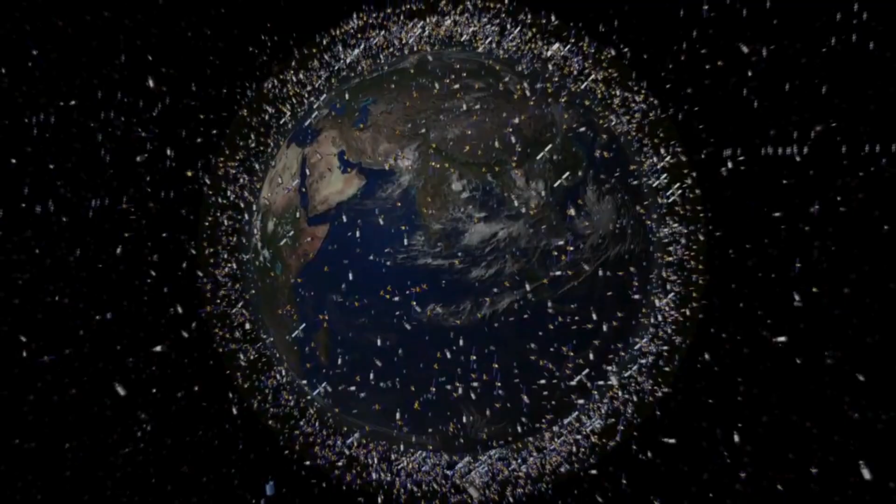The population growth, rapid urbanization, and the changes in the city of Hyderabad has seen the coming of the Greater Hyderabad Municipal Corporation. The Greater Hyderabad Municipal Corporation, or GHMC, is the local government for the cities of Hyderabad and Secunderabad.

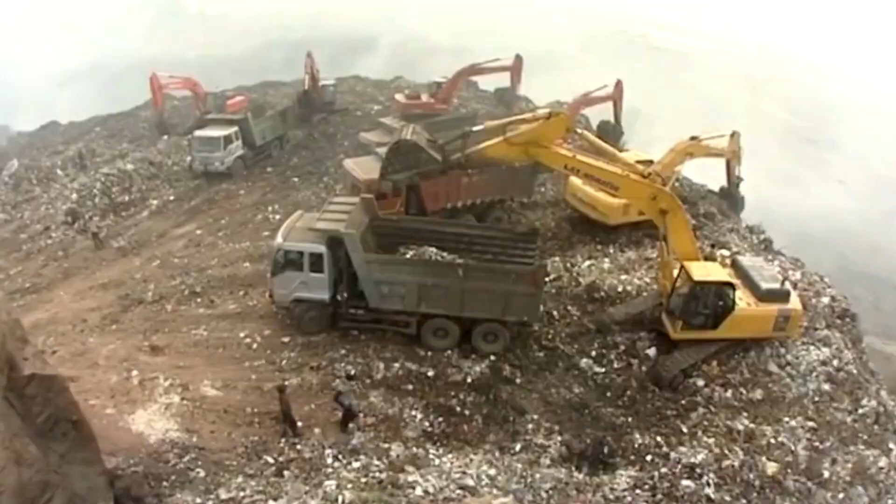Improper management of municipal waste by disposing it unscientifically into open dumps and landfills is creating huge problems to public health and environment. With a commitment to better the environment and to provide the best sanitation services to the citizens of Hyderabad, Ramki Enviro Engineers, a pioneer in waste management, has established a quality delivery system, the Integrated Municipal Solid Waste Management Project. The HIMSW project uses the most environmentally sound strategies for municipal solid waste.

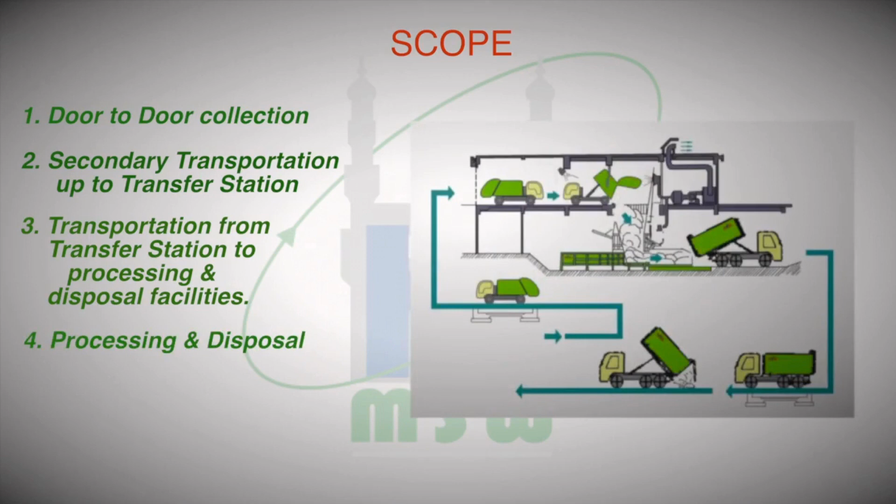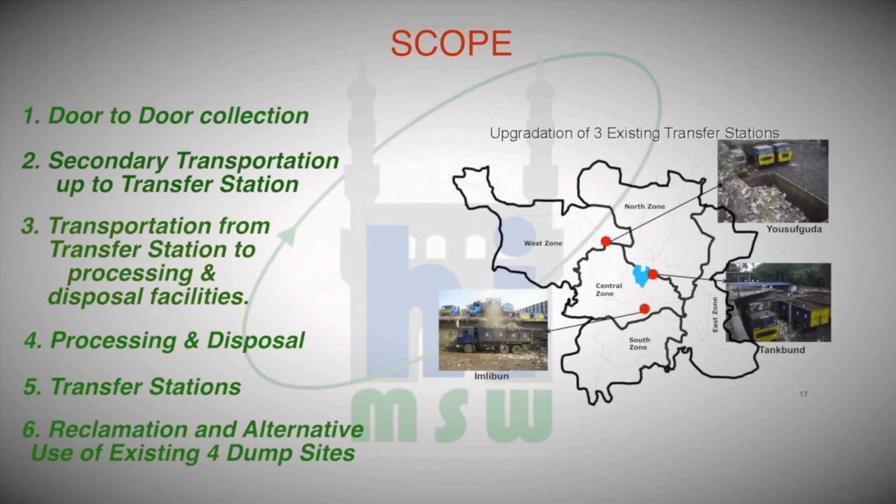Scope: door-to-door collection, secondary transportation up to transfer station, transportation from transfer station to processing and disposal facilities, processing and disposal, transfer stations, reclamation and alternative use of existing 4 dump sites.

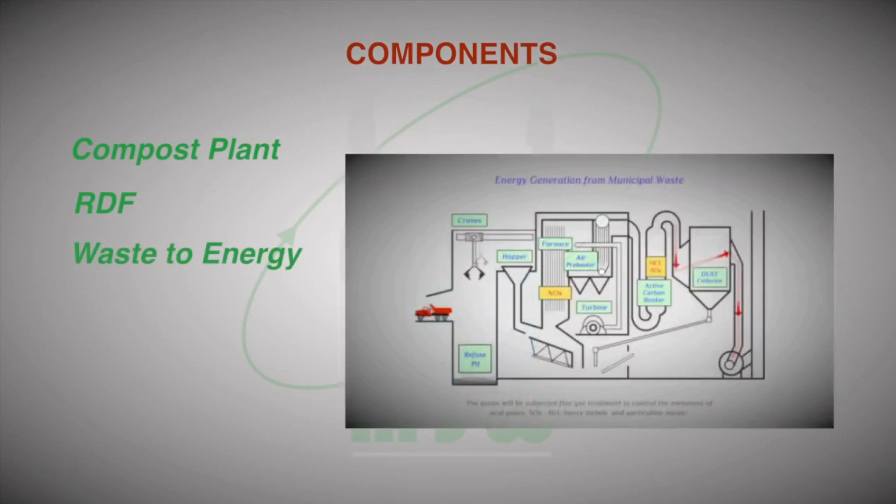Components: compost plant, refuse-derived fuel, waste to energy, landfill operations, capping of existing dump, leachate management.

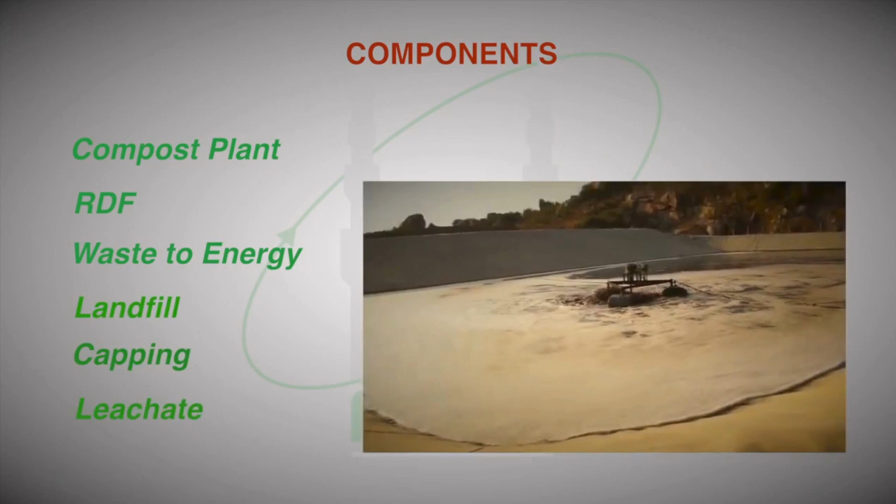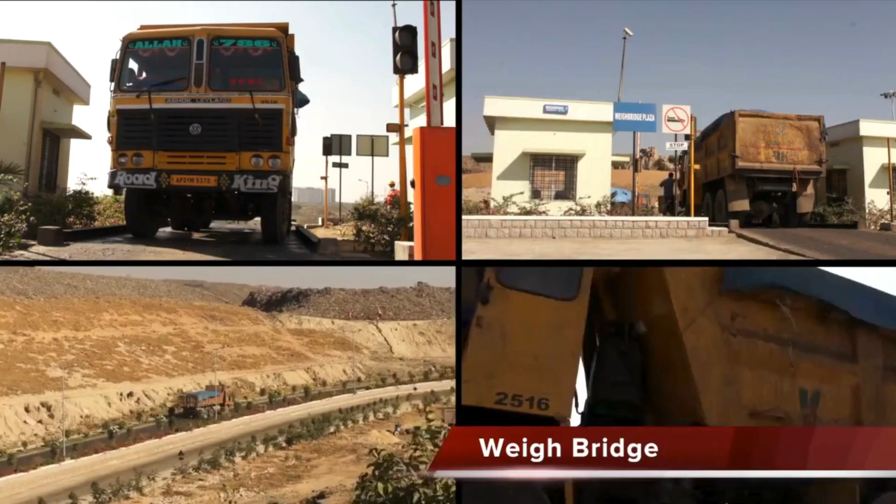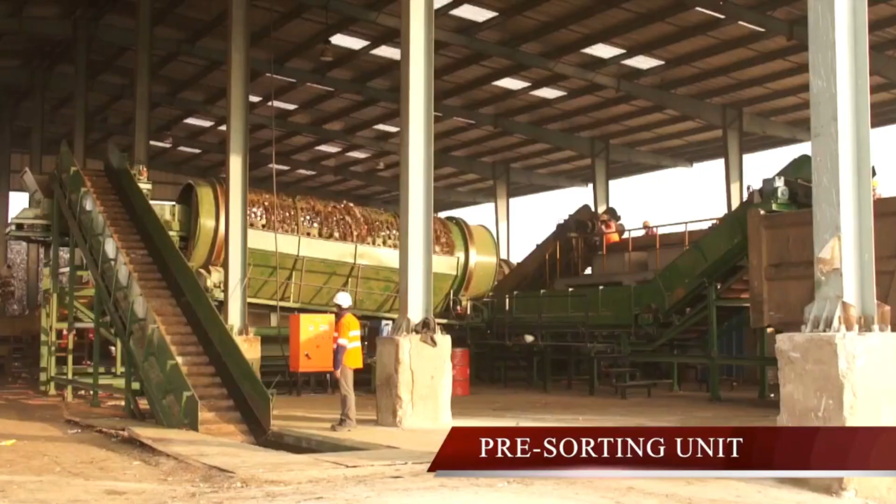The waste transported from the transfer stations is brought to the facility where each truckload is weighed and data entry is made using computers with data servers for storing and retrieving each entry. The weighed trucks are offloaded at the tipping floor of the pre-sorting unit and loaded onto conveyors using dozers. The waste is passed through a 100 mm rotating screen or trommel with screens of 100 mm sieves.

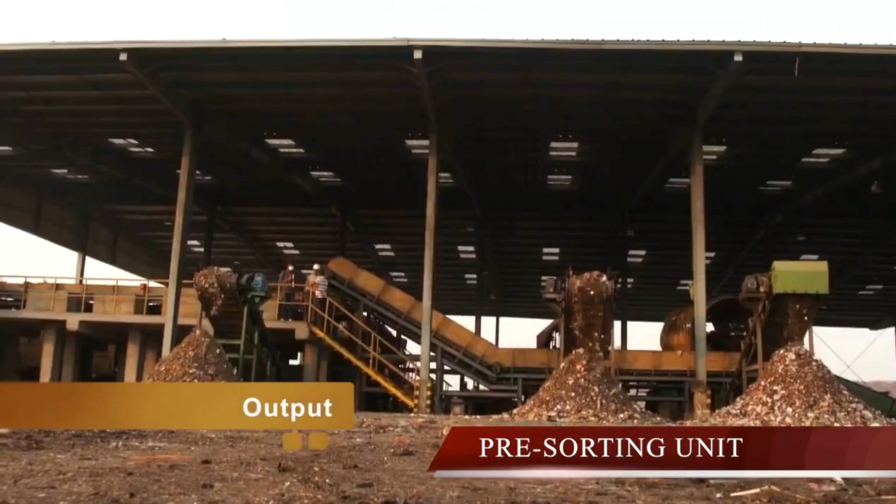The recyclable material, like plastic bottles, is recycled at a recycling plant inside the facility. The material besides the recyclables, with size more than 100 mm, is known as combustible material due to its high calorific value.

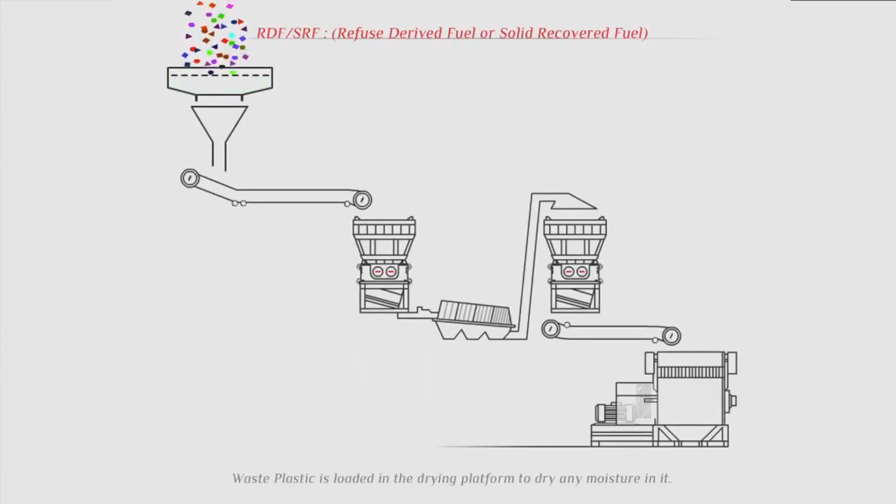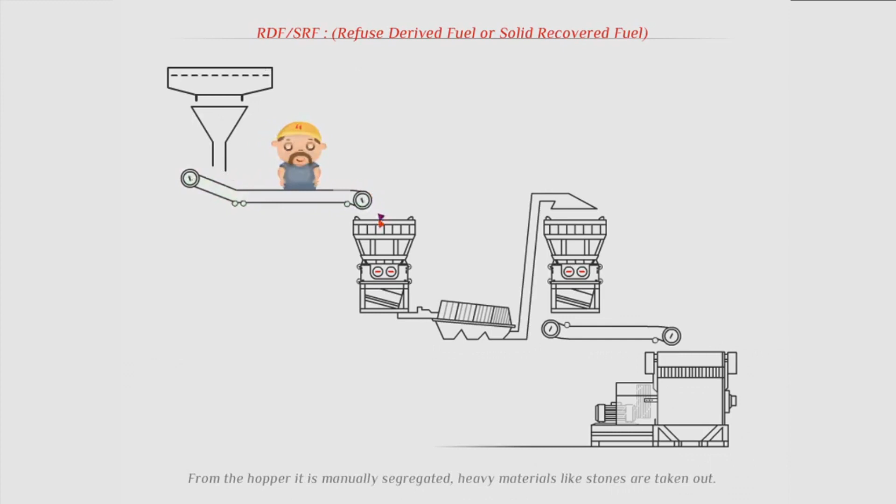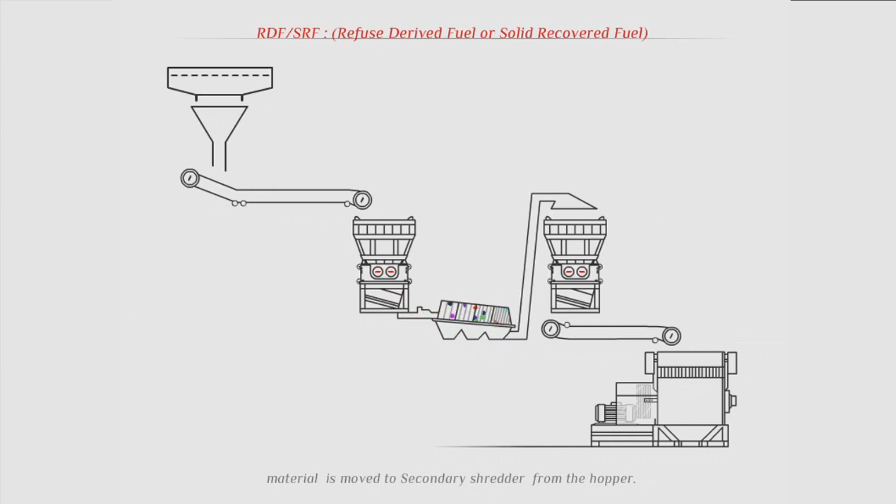Refuse-derived fuel: the segregated combustible material is further processed to get refuse-derived fuel or solid recovered fuel. The combustible material is stored on a dry concrete platform to ensure maximum moisture removal by sun drying. The dried material is fed to the hopper of a primary shredder, where material greater than 100 mm is shredded to 80 to 100 mm material.

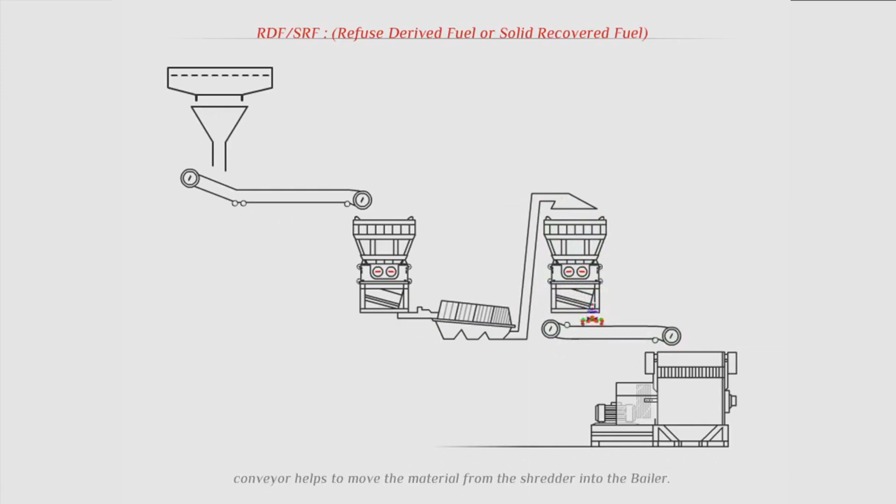The primary shredded material is fed to the hopper of a secondary shredder that reduces the material size to less than 25 mm. The secondary shredded material is then conveyed to a baling machine for packing. These bales are then stretch wrapped and transported to cement industries as fuel.

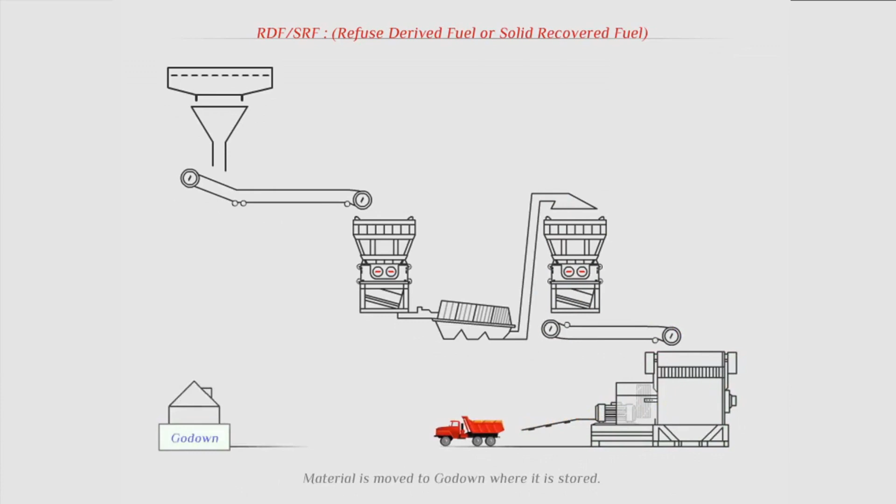The segregated material passing through the 100 mm sieves of the trommel are further processed using the windrows process. The windrows are turned for 28 days to ensure complete exposure of organic material to oxygen. They are sprayed with herbal sanitizers to ensure better decomposition and to ensure no odor is generated.

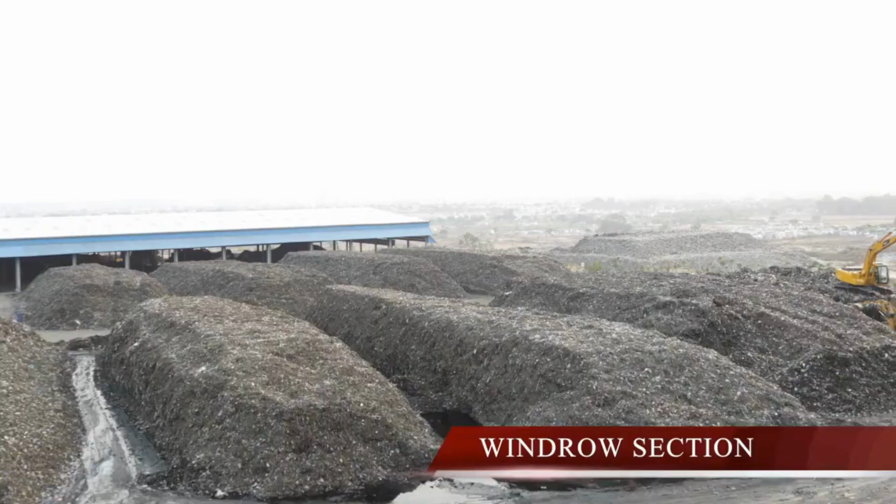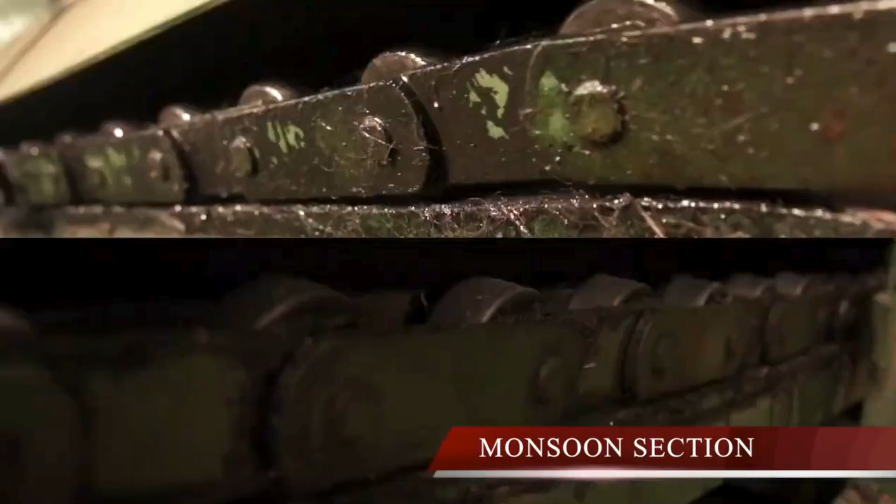The material from the windrows section is further refined by passing it through rotating screens of 35 mm sieves. The material with size more than 35 mm is segregated, which can be briquetted and used as an alternative fuel to fossil fuel in energy-intensive industries.

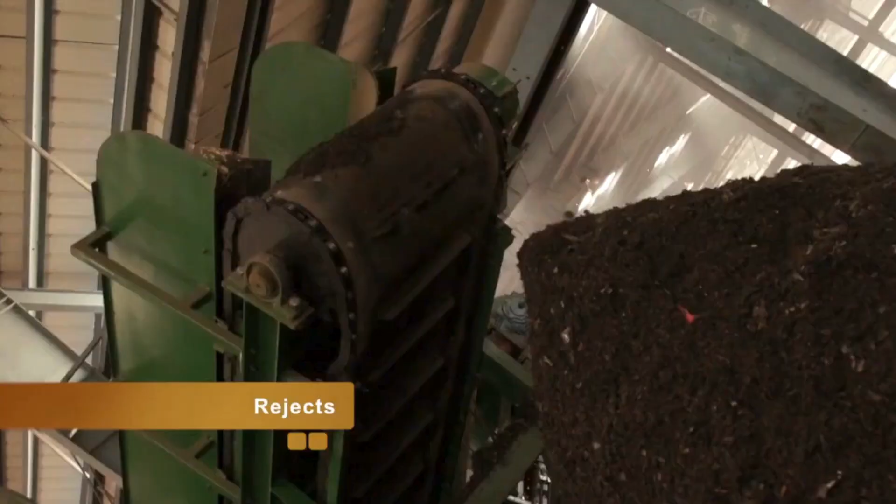Material less than 35 mm is further screened using trommels with a screen or sieve size of 16 mm. The material with more than 16 mm size is segregated and briquetted for cement industries as fuel. The material less than 16 mm is stored in the curing section for final screening and curing.

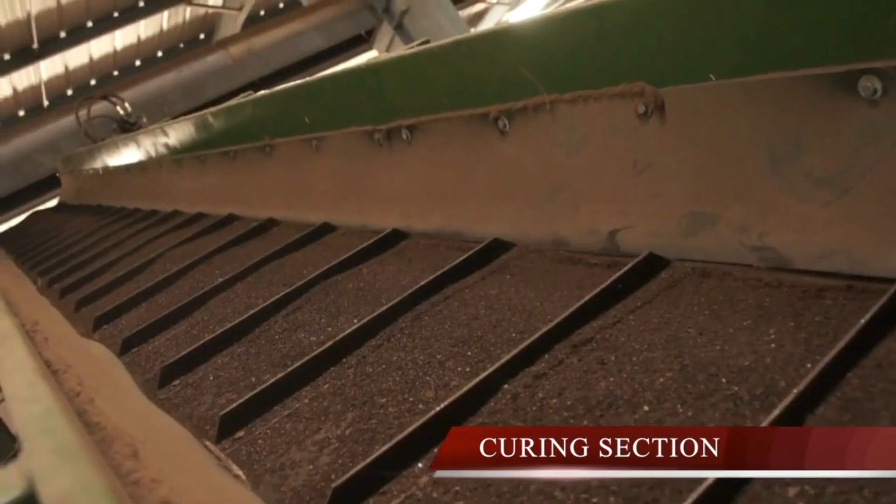In the curing section, the output of the 16 mm screening is sent through a final set of screens or trommels, which segregates materials less than 4 mm. The final output is refined, which meets the fertilizer control order standards and is used as biofertilizer in the agricultural sector.

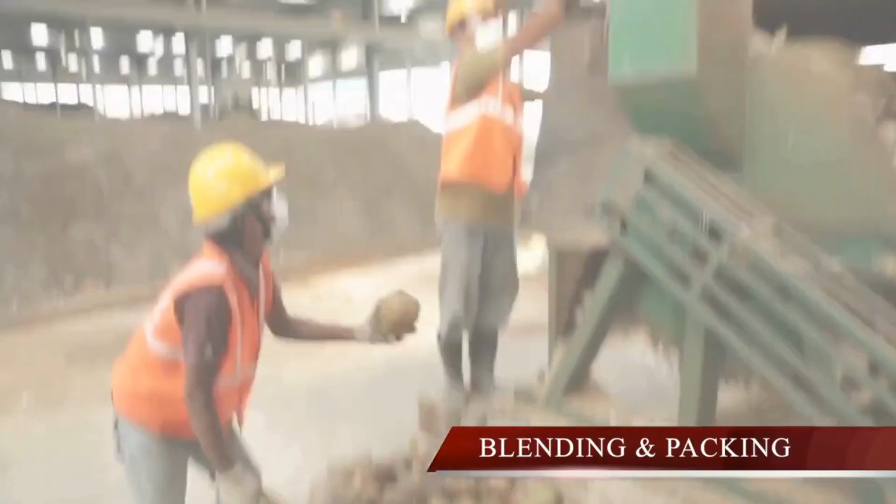The final output is further blended with additives to improve the product value and packed in a blending and packing shed for dispatch to fertilizer companies. Other recovered products include coconut coir pith from shredding of coconuts. The coir is baled and sent to small-scale industries and as fuel to factories.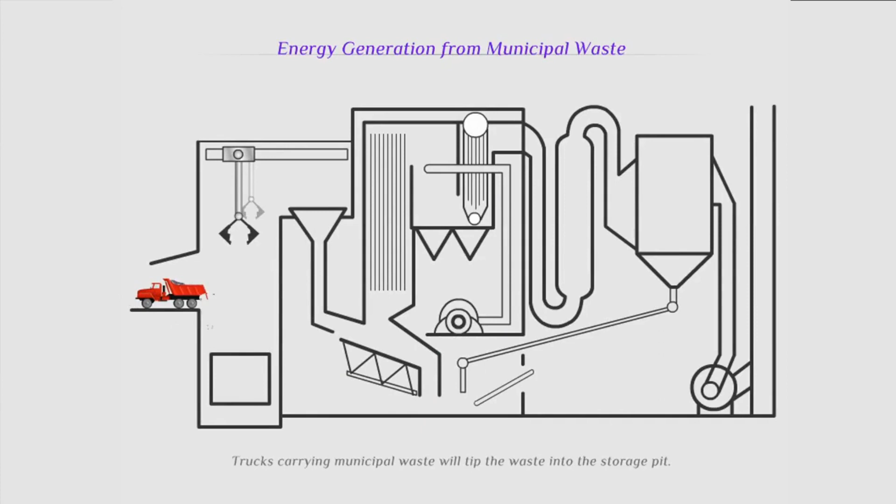The waste from the trucks is tipped in a storage pit. The storage time for the waste is 7 days with leachate separation for charging the waste. The charged waste is fed to a hopper using cranes.

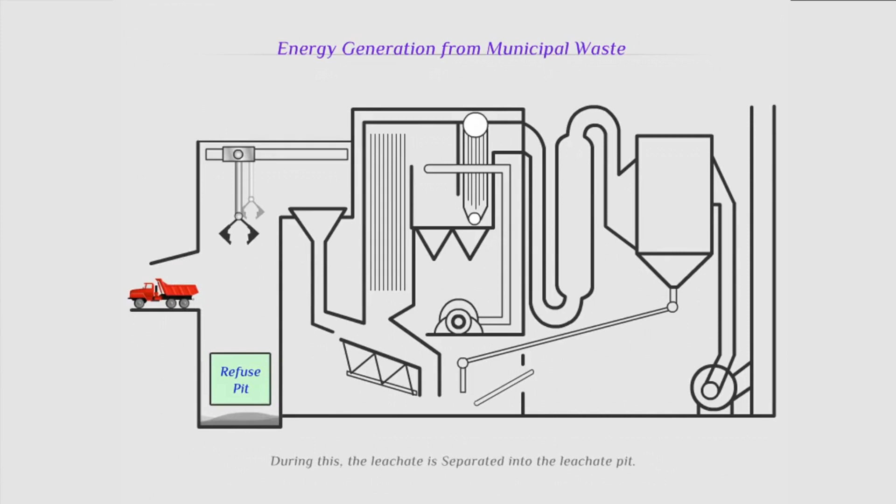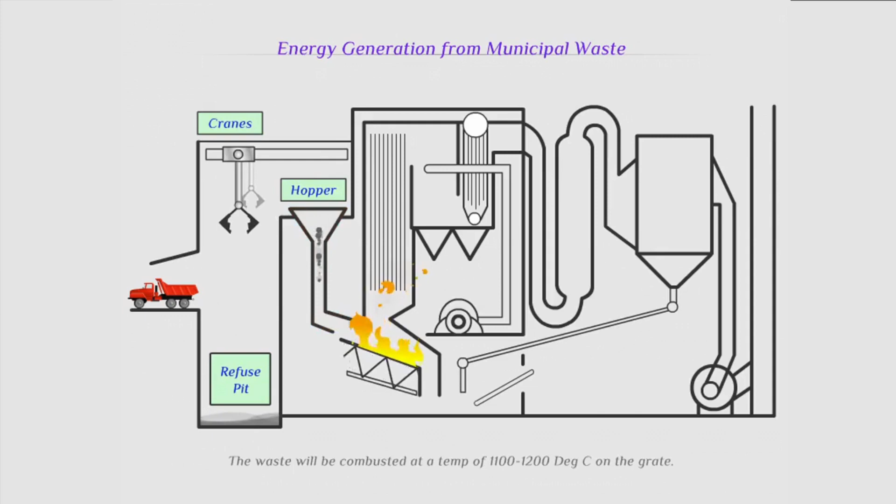The waste is then passed on to moving grates that combust the waste at a temperature of 1100 to 1200 degrees centigrade. The engineering design of the furnace ensures that the intermediate gases go through complete combustion to maintain a temperature of 850 degrees centigrade. Maintaining this temperature ensures that dioxins and furans are not formed in the process.

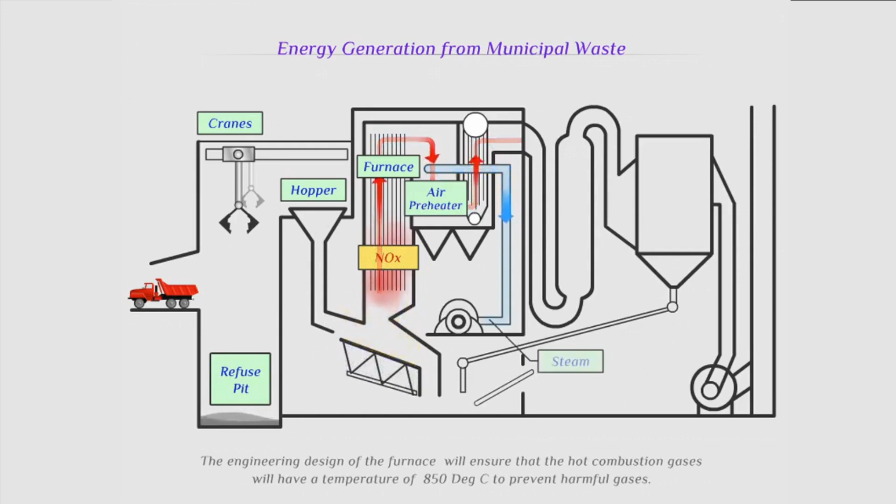The heat energy is passed into a boiler for generating superheated steam. This steam is used for driving the turbine and electricity generation. The electricity generated is exported to the grid after captive consumption of 15 to 17% of total electricity generation.

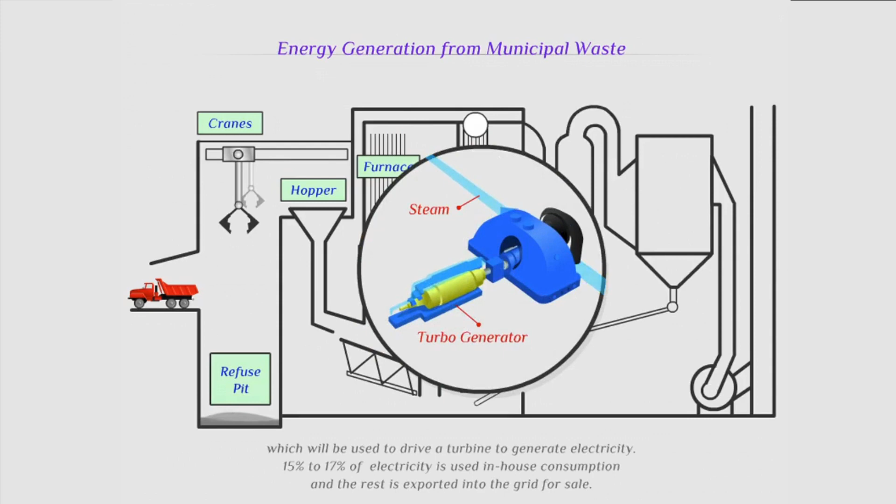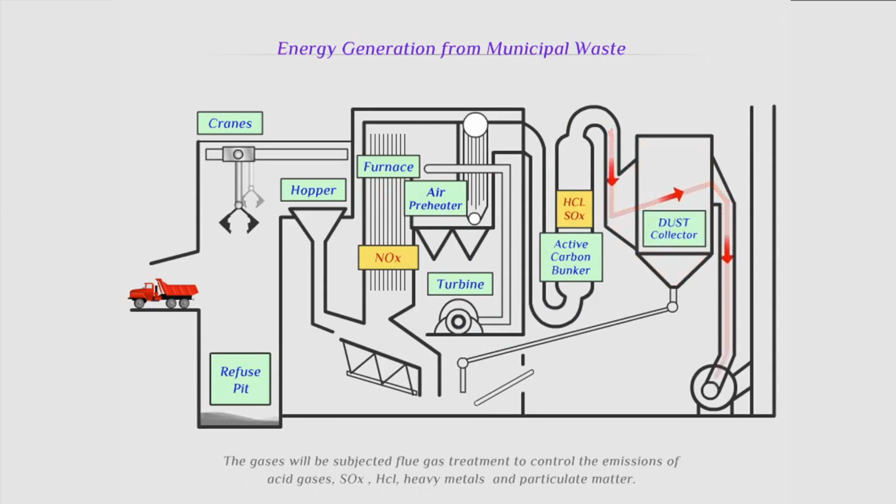The residual gases from the process are passed through an air pollution control system, which comprises scrubbers for removal of acidic gases such as nitrogen oxides, sulfur dioxide, hydrochloric gases, any heavy metals, and activated carbon filters. Any particulate matter is removed by using dust collector systems and precipitators. The bottom ash from the incineration process is removed and can be used for construction purposes.

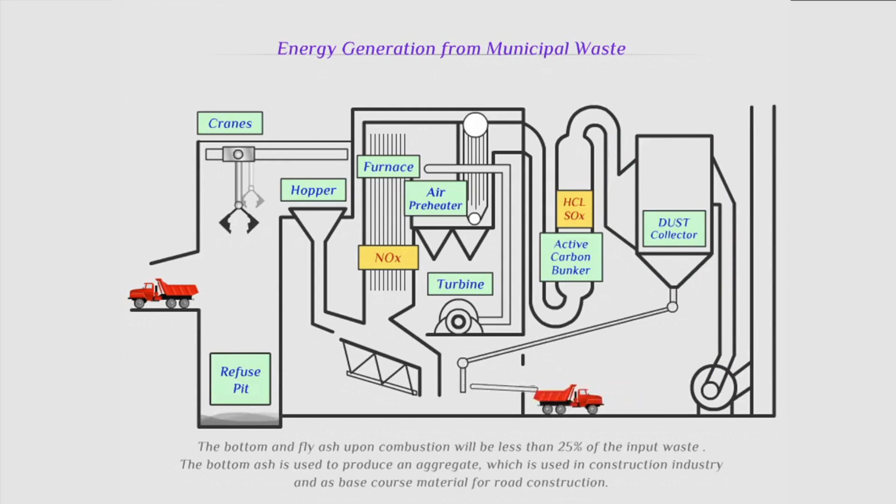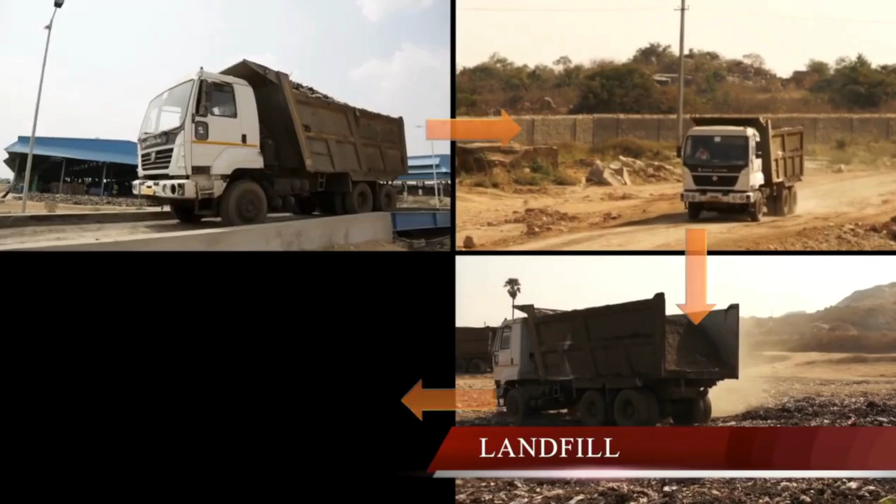Landfill. The processing of waste generates various byproducts. The inert material that is essentially present in the waste, or is a rejected material of the process, is disposed to a secure landfill.

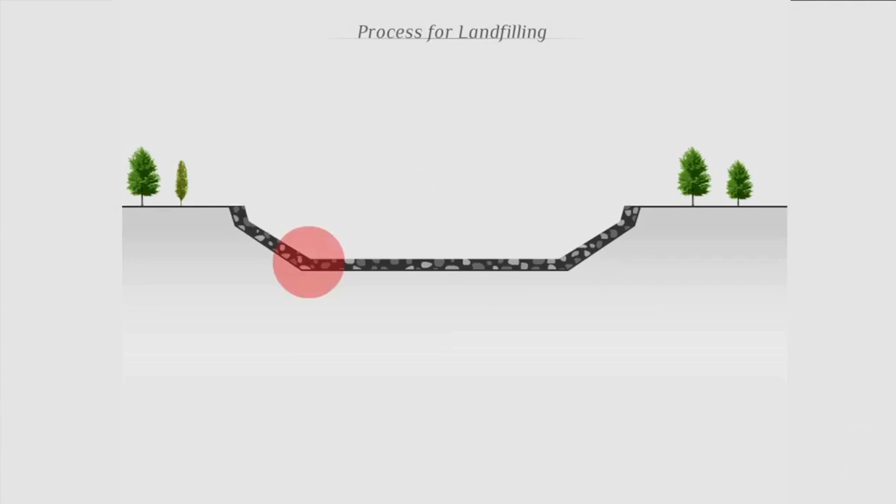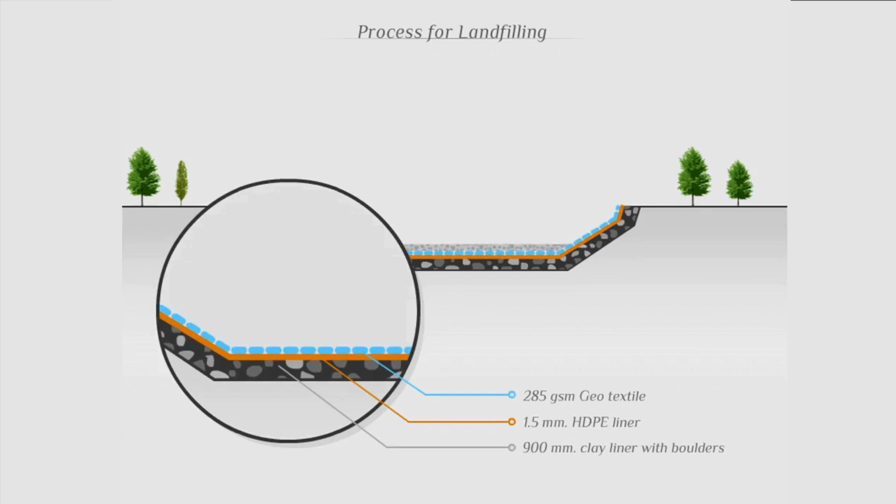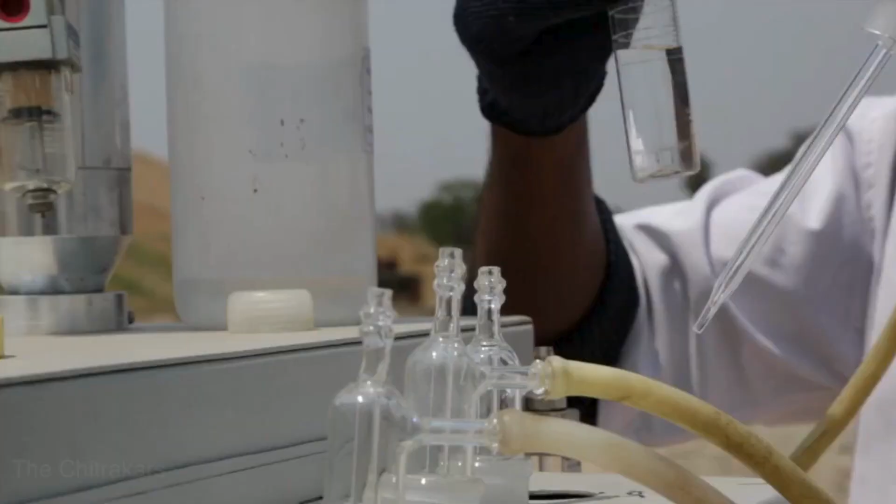The landfill comprises multiple layers of boulders, clay, HDPE sheets, geotextile, and a leachate collection network of HDPE material. These layers are of varying thickness to ensure that no leachate from the landfill percolates the soil and groundwater. Landfill operations are closely monitored to record any leachate movement.

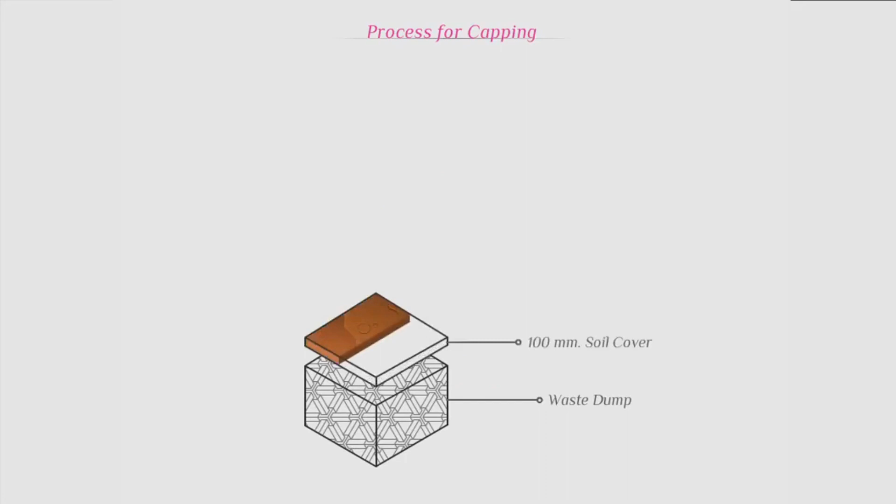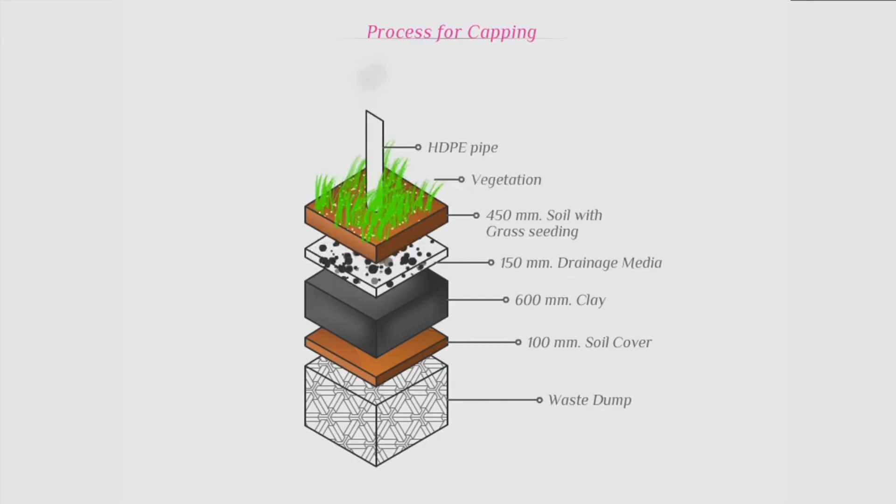Capping. The existing site for the waste management facility has the legacy of years of waste dumping. The waste dump is capped using scientific methods. The process requires laying an HDPE piping network for collection of leachate, covering of soil followed by clay lining, geocomposites, additional thicker soil layer, and vegetation cover. A piping network is also laid for collection of any methane gas and flaring, to mitigate release of greenhouse gas emissions.

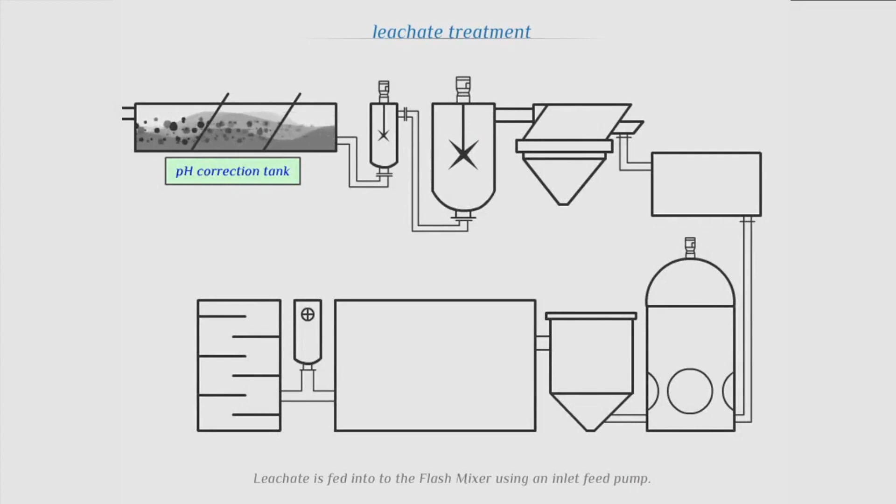Leachate management. Leachate management is a crucial aspect of the HIMSW project. All the waste stored and waste management processes generate leachate. The leachate generated at site is collected through an extensive pipeline network. Raw leachate is pumped to a chemical dosing tank with a flash mixer. Alum or coagulant is added to the tank to create flocks from the suspended solids in the leachate.

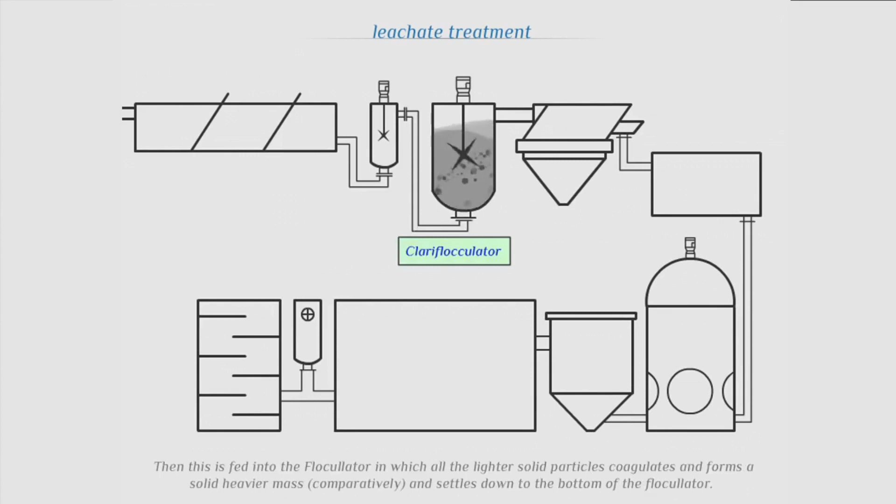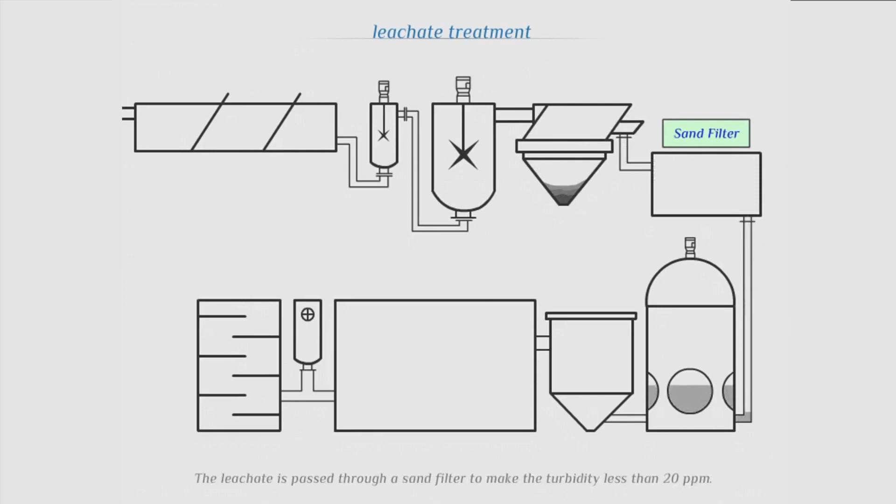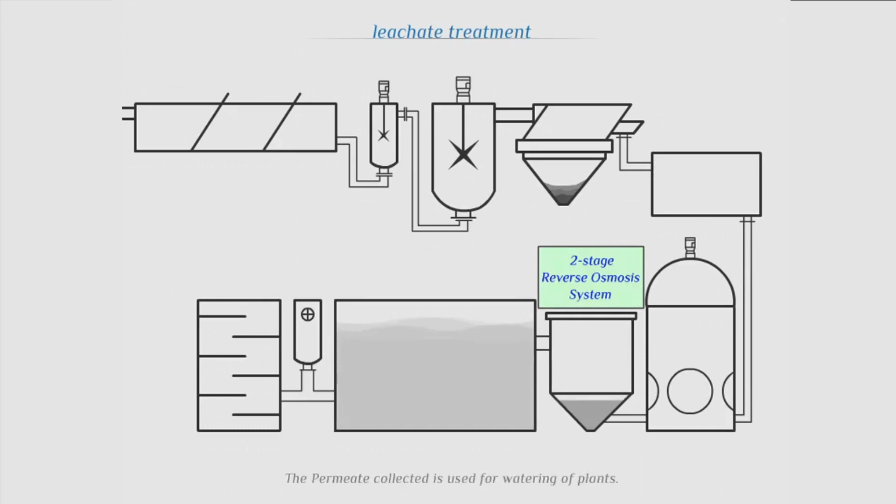The leachate is passed into a lamella settler that settles the flocks of suspended particles. The supernatant is passed through pressure sand filters that remove the remaining suspended solids and reduce turbidity. The leachate is then passed through a two-stage reverse osmosis system, which uses membranes for filtering the leachate of all contaminants and provides clear permeate, which is used for greenbelt and landscaping development.

As we do our bit for the environment and for the generations to come, we strive to deliver service excellence to save natural resources, conserve energy, reduce pollution, reduce the toxicity of our waste, and save money for consumers and businesses. The project is a model for inclusive and sustainable development for our society. HIMSW extends the vision of Ramky Group towards sustainable development.

What do you think? Can you speak more details, share the screen for everybody? Yeah. Nice.